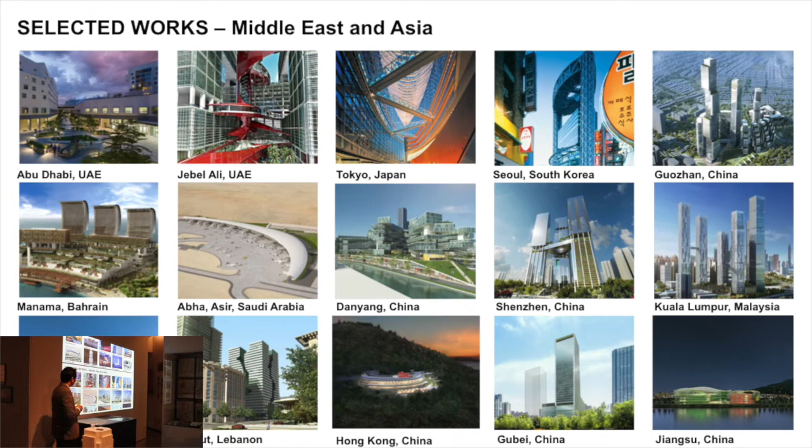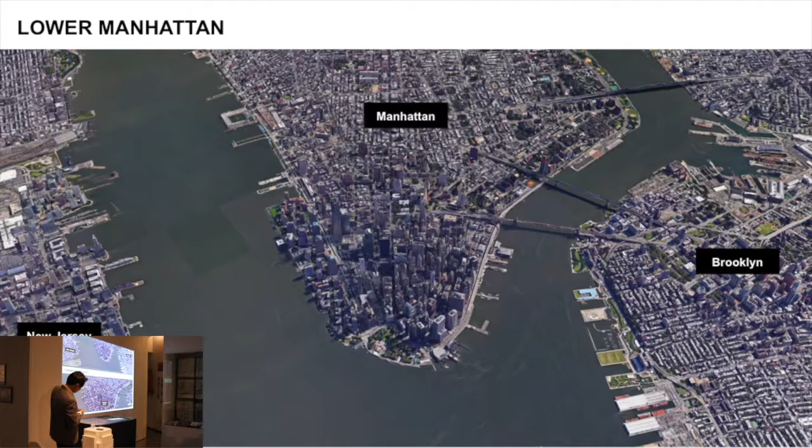So 125 Greenwich is actually very close to here. You can probably see the building going up as you go out after the presentation. It's in the downtown area. The screens are a little broken, but it's in the financial district, right south of the memorial, very close to the 9/11 site. And this was the existing building before we got on the project.

When we first got the project, the brief was to create a unique residential tower which meets the neighborhood, which is rising as a new residential neighborhood downtown. Because downtown in New York City, not that long ago, was not considered a really good residential area. But now it's becoming a really uprising residential market in Manhattan.

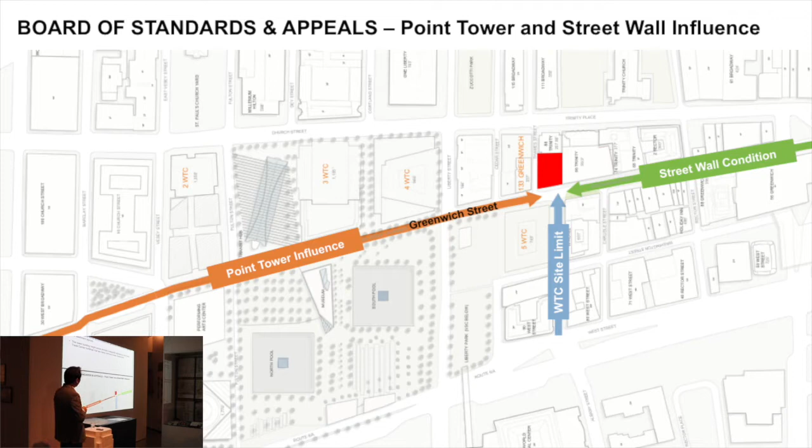There are many unique aspects about this building design, but tonight I'm going to focus on some of the zoning challenges we had, and the way we overcame that zoning challenge, which was the setback issues of this building.

The site was bound by the 9/11 World Trade Center Memorial Site, where you can see 4 World Trade Center right here. Now there's a Marriott Hotel right here, and we have a W Hotel to the south. To the south of this, we have the American Stock Exchange Building, which is a landmark building right next to our site. From there, most of the buildings are street wall type old pre-war buildings, and a lot of them are actually landmarks.

So hinging from our site, you have the brand new towers of 1 World Trade Center, 4 World Trade Center, and the Oculus. So all these new towers with the memorial to the north, and very traditional New York City downtown street wall architecture to the south.

We had air rights bought from the American Stock Exchange Building, which is a landmark, so they were not able to build any more height on their building. The owner bought the air rights of the building, so because of those air rights, we had a tremendous amount of square footage we could build onto this tiny little site, which is barely 80 feet wide and 100 feet long.

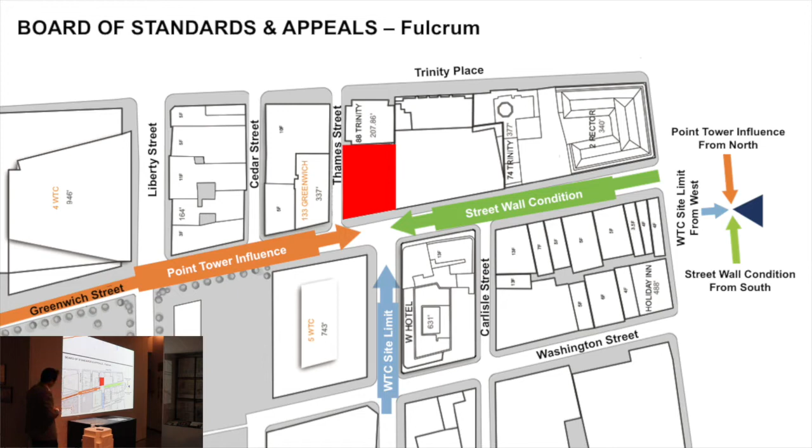So if you look at the slides, this was the 20-foot setback scheme we did. To study the scheme, we came up with the minimum dimension of the room sizes, the minimum width of the room, minimum depth of the room, and things like that. We found that to make the 20-foot setback work, we ended up having very inefficient spaces in the end, which makes the building very, very unfeasible. And then efficiency goes down.

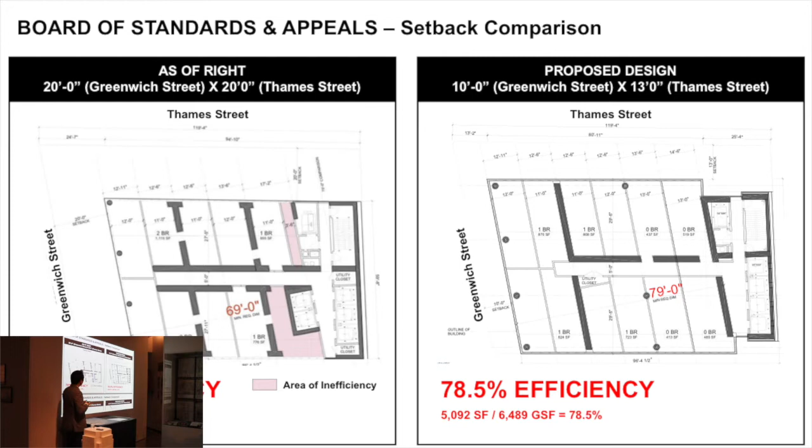Because if the building is smaller, it's going to be taller. So we need more elevators, which take up more space from the circulation point of view. So we had a very low efficiency with the 20-foot setback because of the height of the building. So what we proposed was that instead of 20-foot and 20-foot setback, we proposed smaller setbacks, so we can build a bigger plate, and then we can build a shorter tower.

So we proposed a 10-foot setback on the Greenwich Street side, and a 13-foot setback on the Thames Street side. We proposed a slightly bigger setback on the Thames Street side because, if you have a chance to walk Thames Street, it is a really, really narrow street, and we have a hotel which is already built and used right across the street. So our building is extremely close to that building, and we wanted a little bit more buffer on Thames Street.

And also the depth of the building: if it is too deep, the efficiency is not really working that well. So when we studied the optimal depth of the unit and the distance from the neighbors, we decided 13 is an optimum dimension for the setback on the north side.

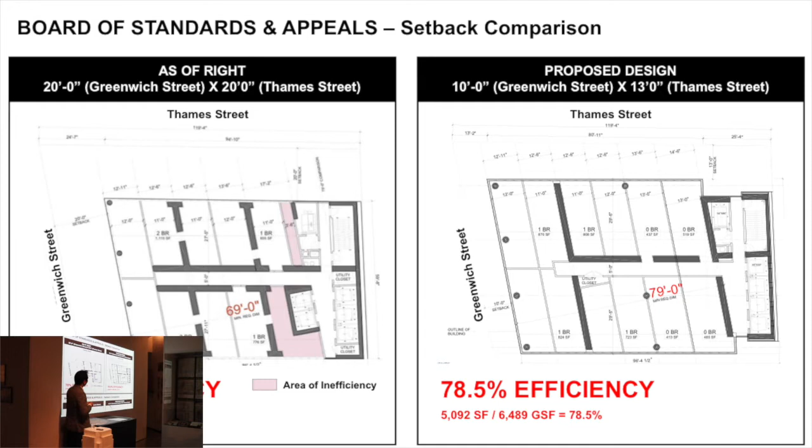So we created this little image to convince the BSA board and the committee board that we needed a variance of the setback dimension, saying that if we do an as-of-right building, which we can do, the building is going to be over 1,000 feet tall, very slim, very challenging, and also kind of out of context with other tall towers on the site. But if we do the smaller setback by variances, we can do a slightly shorter tower, much more efficient, and it's going to fit into the surrounding buildings.

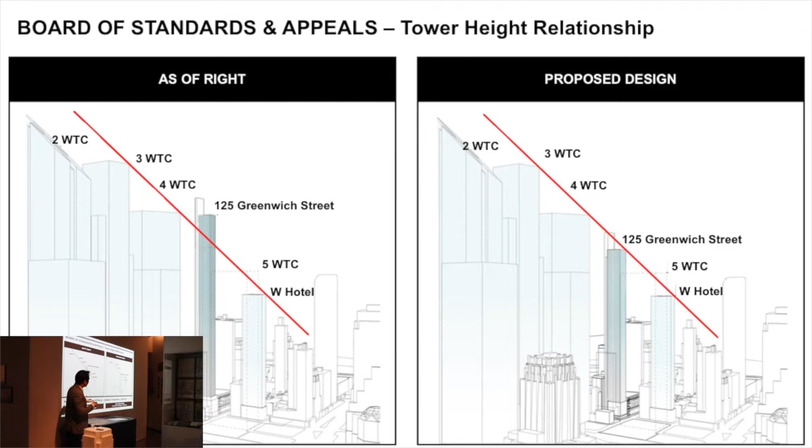It's kind of hard to see here, but the height around our project is fairly tall, and if we fit within the 900-foot realm, our building is going to look like the last piece of the World Trade Center site, because all these tall buildings, starting from the World Trade Center, are kind of coming down in terms of height. So instead of having a very tall building sticking out, we said if we can get the variances, we can do the tower within the height of the surrounding buildings, which fits better than the as-of-right. And also, Steve did some engineering comparison.

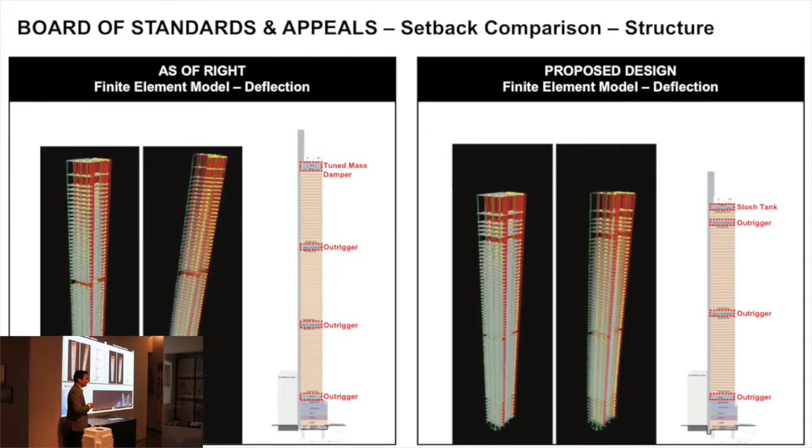Just so you know, in terms of ratio, the BSA scheme, which is the current scheme, had a slenderness ratio of about 1 to 14. If we go with the as-of-right, with the 20-foot setback, this could have been 1 to 20, even more. So there's no comparison in terms of engineering. It's kind of hard to see here, but this was the original scheme we proposed for the competition, and that was the BSA scheme when we went to the BSA board.

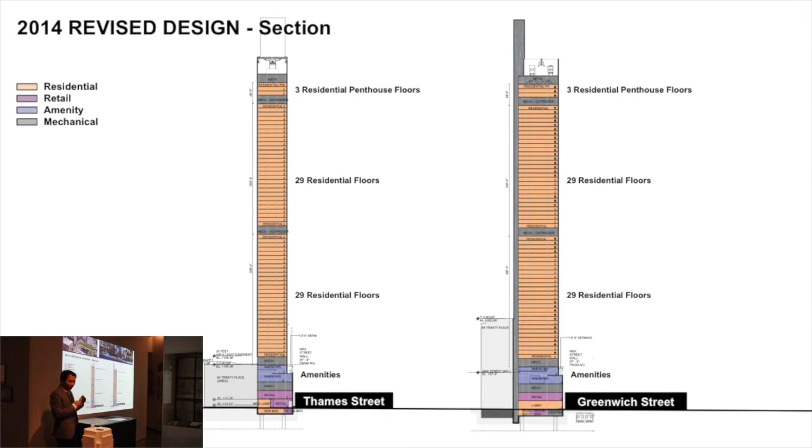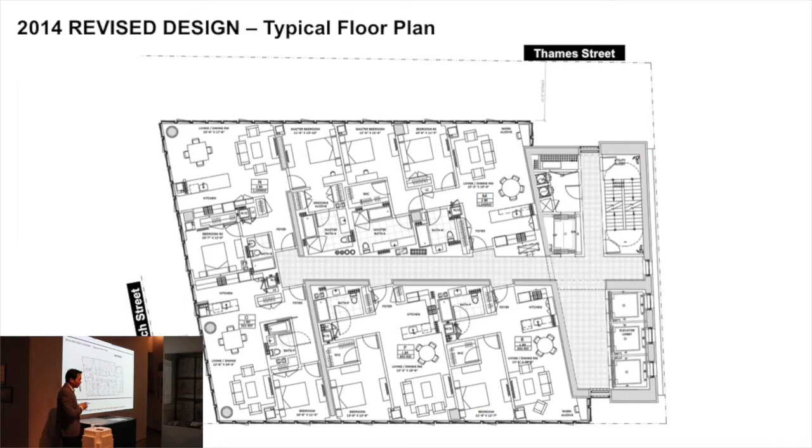So that was the major part of the design for the BSA, the setback variation to get to the height of the building as of now. And that was a typical plan at that time. At that time, the building was actually planned as a rental building. Then there was a market change in 2015, and the client wanted to change the project from rental to condo. When that happened, we looked at both options again.

For the super slender tall building, the client wanted to look at an option of actually doing the condo super slim, which is the as-of-right scheme. In the end, we convinced the owner that the BSA scheme is more efficient and more feasible, even for ultra luxury. One of the factors which made the decision possible was that the downtown market in this neighborhood is completely different from Midtown. If you think about 432 or the 57th Street projects, all the units are very large. 432 has a 1,300-square-foot one-bedroom apartment, which is very rare in New York City.

In this neighborhood, in downtown, basically we're saying no one's going to buy a 1,300 square foot one-bedroom unit. So this is more of the market for young professionals with probably one kid or no kids, starting a career, working in the financial district, and so the units are going to be much smaller sizes, more towards the one-bedroom, studio and two-bedroom units, and a very small number of three-bedroom units. But it's going to be very luxury too, because of the height and because of the neighborhood also.

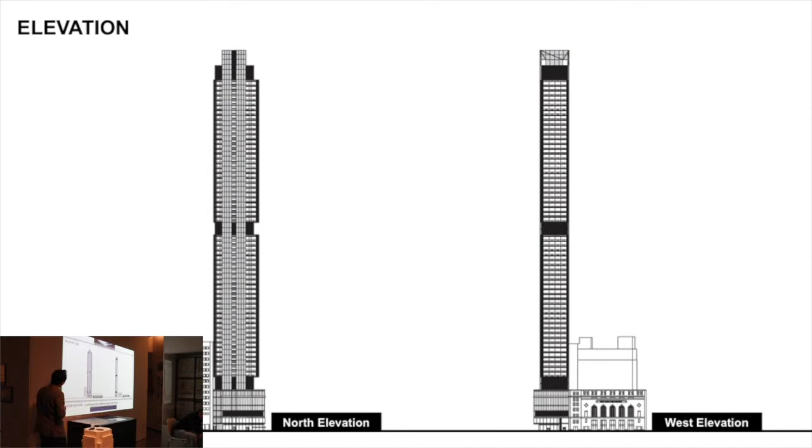And then the other thing about the final design of the new tower was that when we decided to go with the condo, one of the moves the owner made was putting the amenities for the tower at the top of the building. So you can slightly see the top floor over there is a double height. That is actually a pool for the building.

So Rafael actually made this argument that if you are selling these apartments to young people who basically spend their nights in a 400 square foot studio, not everybody in the building is going to have a great view. So one way of appealing to the market is that you can have the view whether you're living on the 3rd floor or the 50th floor: you can go up to the top of the building for your lounge, for workout, for swimming, and enjoy the view. Everybody in the building can go up to the top and enjoy the view.

But it's not easy, because naturally you want to put the most expensive apartments at the top of the building, but having the amenity on top has a very unique aspect, which is very, very appealing to the market. In the next slide.

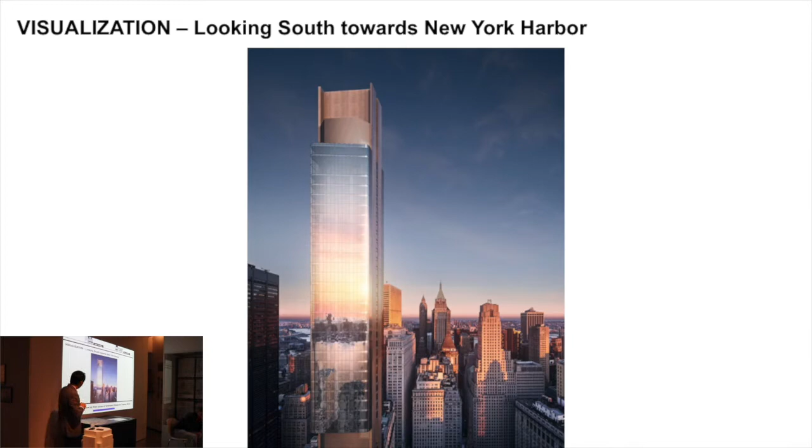And also Steve's going to talk a lot about the structure of the building, and we also have a very strong structure, which is holding the building but also works with the layout of the building. So we use the structure, which is big shear walls running north and south and across the building, to basically compartmentalize the plan. So we can use that for demising between the units and combining units and things like that. We can see that in the plan.

And then we also created a very unique podium in the tower. Since we moved all the amenities, which are normally in the podium, to the top of the building, we have a podium which is residential units. We don't have the plan for the presentation tonight, but we also have loft units here, which kind of follow the American Stock Exchange building's design language. We have very tall windows, and within that window we have loft units looking down at the memorial.

So this is looking south. So we have the World Trade Center right north of us. So the north view is kind of limited if you're dead on to the north, but we are very open to the west and the east. Next slide. And then the west view is just amazing.

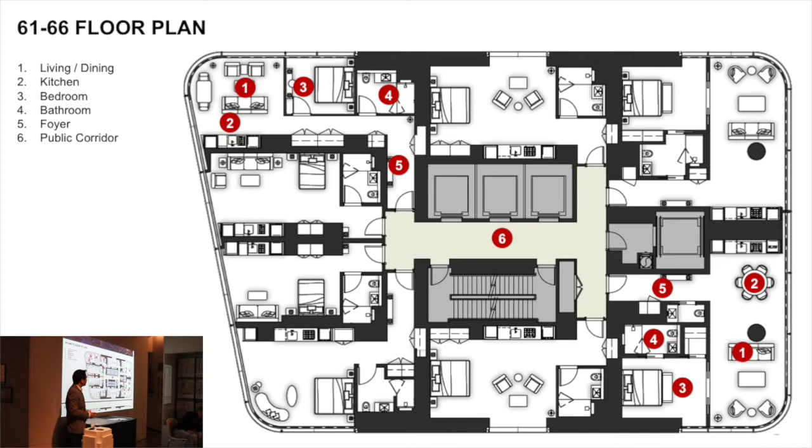So next slide. You can see that this now becomes 2 units. Before it was 4 units. In the next slide, this unit is combined with the unit in the middle and becomes a 3-bedroom unit, and the one in the middle becomes a master bedroom. So we basically create a series of compartments from the structure and use that as the layout. Next slide. And then that was a penthouse.

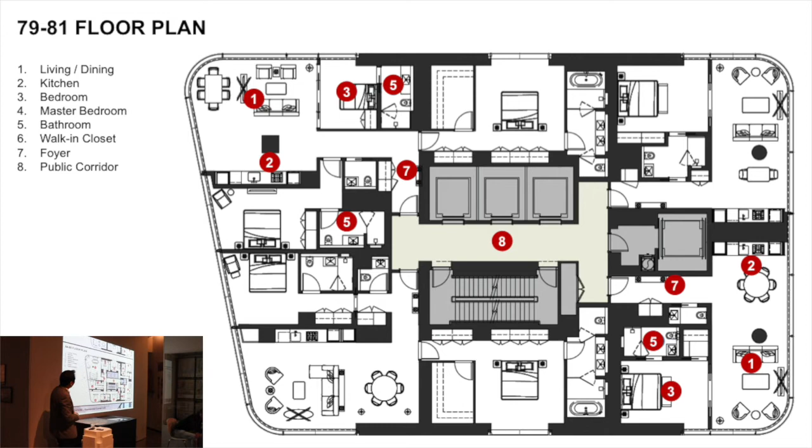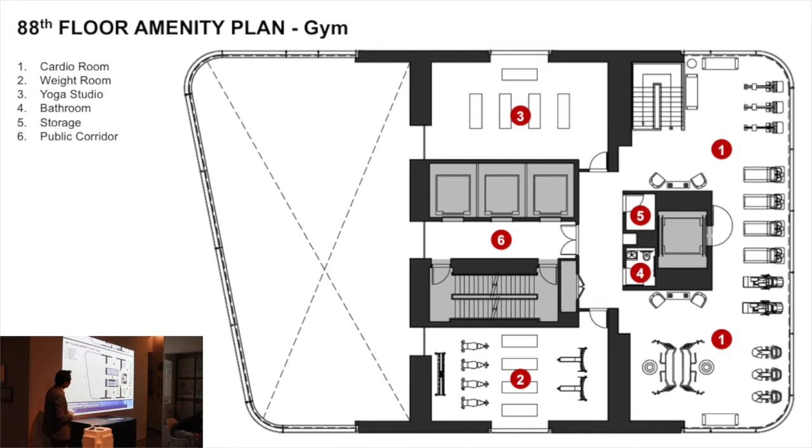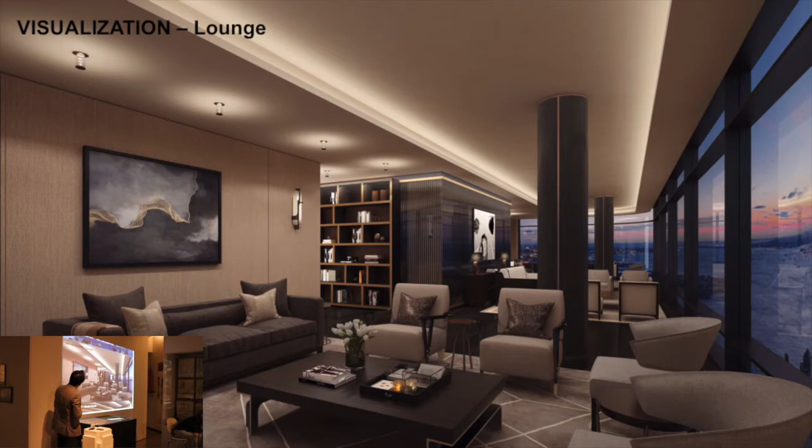So if you look at the rendering, next slide, basically the top of the building is the club. I think they call it Club 88 because the top floor is the 88th floor, and that's the view of the lounge. That's the screening room. And then that's the pool.

And then on the ground floor, by the zoning, we provided the covered arcade on the Thames Street side. So we basically widened the Thames Street side. It's more walkable now with the project itself. When the project is done, it's going to be more walkable. Right now Thames Street is not even 3 feet actually. Hopefully it'll get better with our project. And then this is a view of the lobby.

And then that was the beginning of the project when the existing building was there in 2013. And then in August, we demolished the building. Next slide. And in 2014, construction started. All right, next slide. And then when the market changed, when we were changing from rental to condo, there was a little bit of a hold up. But construction started back in 2016.

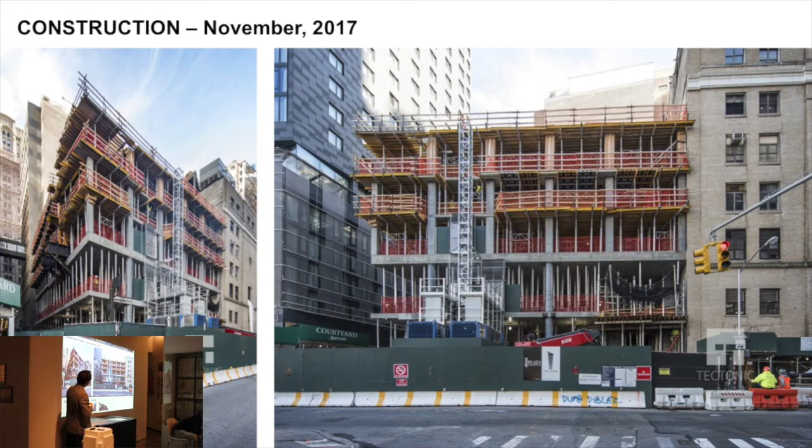And next slide, 2017. Now you're seeing the podium where we have loft units. And the next slide. The last one is a photo I took a few weeks ago, which is pretty much right now. And that's it for the presentation.

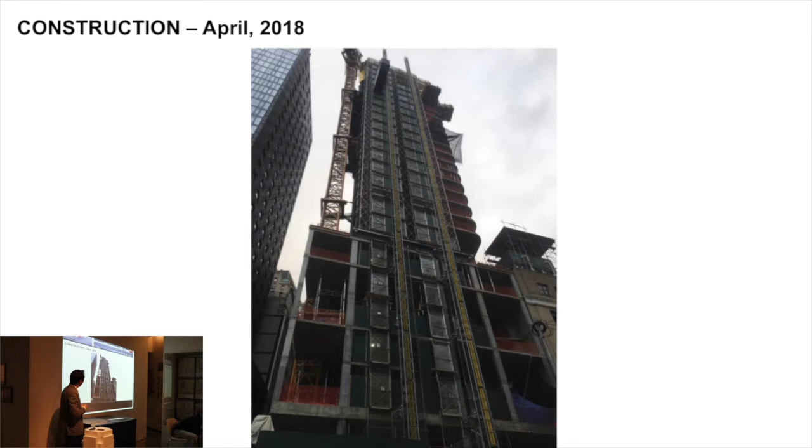Fingers crossed. I've got my timers. Most of my crew's here, so if I've got a problem, I'm assuming one of you guys in the front row is going to jump up and help.

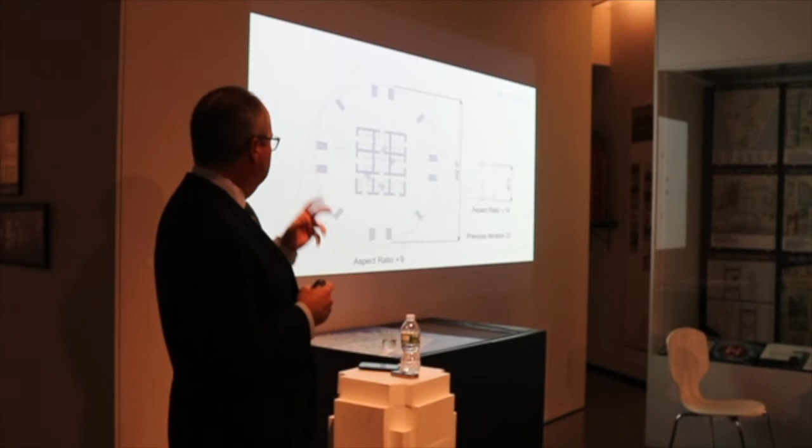But again, what does height really mean? And when we talk about height and the challenges of building tall, I like to think of it more in terms of slenderness, okay? The building to the left is the Shanghai Tower. That is a mega tall building. But when you look at the footprint, it's 242 feet at its widest portion, which gives it an aspect ratio of about 9:1. And again, Jin mentioned that our building, while it's 913 feet, it's 65 feet, maybe even less, puts the aspect ratio at about 14.

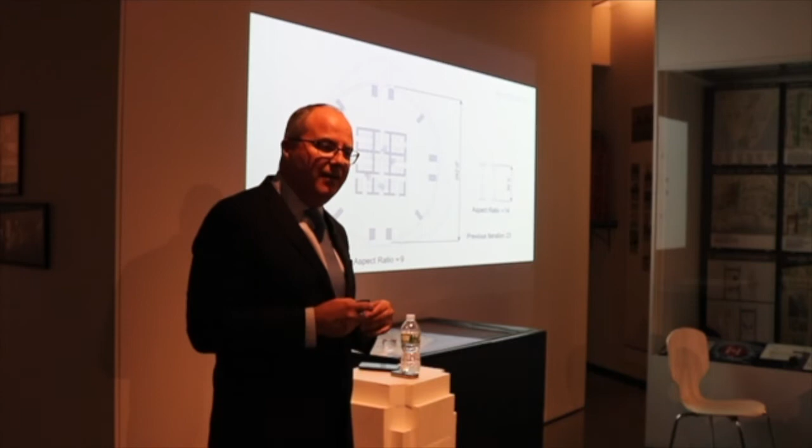So from a challenge standpoint, not to take anything away from the Shanghai Tower, but the challenge, at least as we find it, is not so much in the height, or the absolute height, but it's more in the dimensions of the building, particularly the aspect ratio.

I always start all my presentations, particularly when I'm speaking to students, and you all are students of high-rise: buildings are just beams, and whether they're wide flanges or tubes, they're really actually simpler the taller and taller we go. And I say that facetiously. They're simpler in that we have fewer and fewer parts and pieces to rely on.

Again, and this goes to sort of the theory, right? In our office, relatively quickly, when you look at a high-rise building as a cantilever beam, if you will, you can really draw a circle around the ultimate solution using hand methods, right? Opening up a steel manual or a design manual, looking at the equations for calculating displacement and moment in a cantilever beam. You calculate your wind loads using the code, and you can really determine relatively quickly at least a ballpark of what the solutions should be. Okay? And that's an approach that we always take.

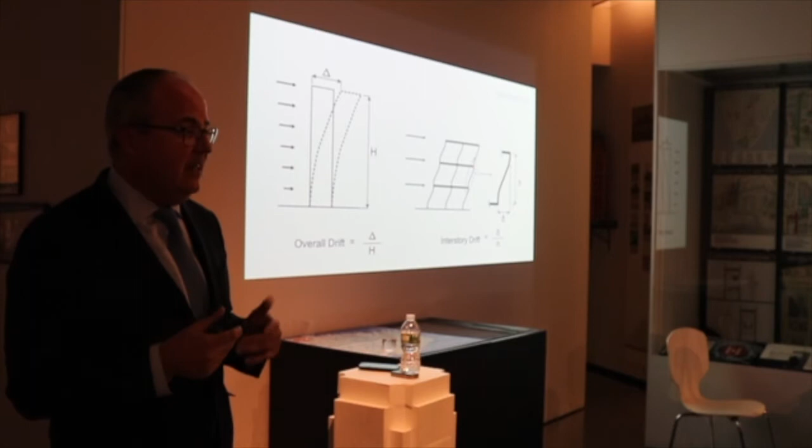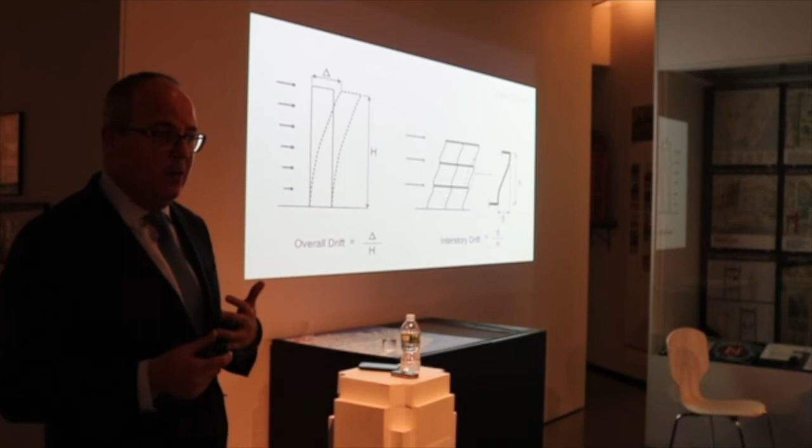They weren't curtain walls. So limiting the amount of motion or movement, if you will, that the building experienced made some sense. It also made some sense from the standpoint that our analysis ability back then wasn't that great. So when you limit the overall displacement of a building, you also limit the amount of secondary effects that occur because of a lot of displacement. So recently we've sort of thrown all of this thinking out the window.

Again, I don't really care how much a building moves. What I do care about is how the building moves. And one of the performance targets that we use is accelerations. Quickly, think of driving in a car, windows closed, music on, 60 miles an hour, you don't feel the speed. If you put your foot on the brake, you feel that deceleration. If you put your foot on the gas, you feel the acceleration.

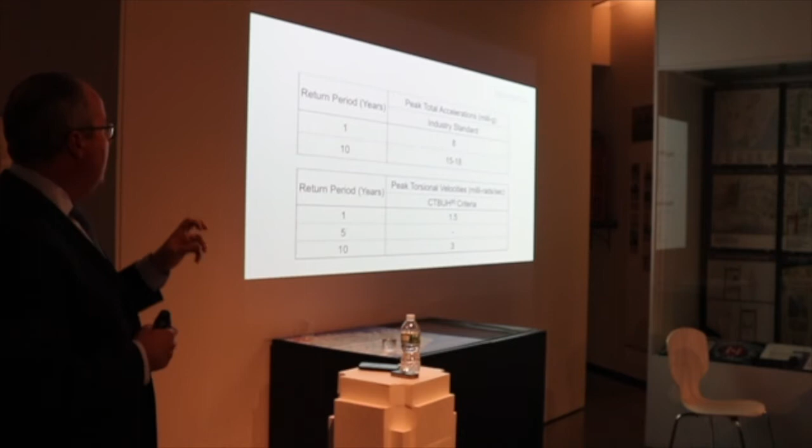So if you think of a building moving in space like an inverted pendulum, it picks up speed, it decelerates, stops, and then starts all over again. Those are the things that occupants feel. They feel and perceive that acceleration and deceleration. So typically we like to limit that. We use return intervals, particularly a 1-year wind and a 10-year wind, and we limit that performance or that response to accelerations measured in milli-g's. That's 1,000th of the force of gravity.

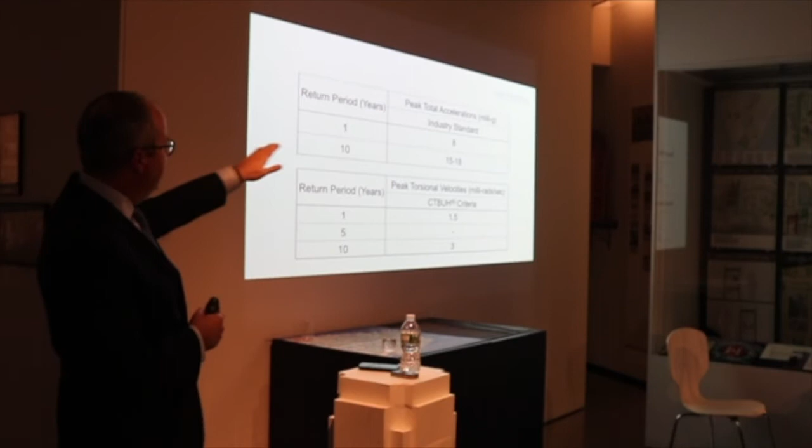A lot of times we're always arguing, and you see 1 year is 8, 10 years 15 to 18. To me, when you're dealing in thousandths of anything, the difference between 15 and 18 is round-off. But I'll get a little into that. So again, these are the performance standards that we set for these high-rise buildings, forsaking really all of the other things that we used to use.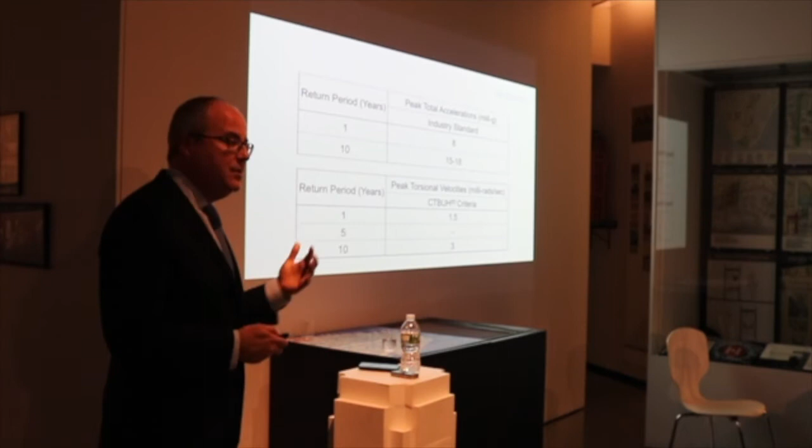This is another interesting study that has come out of a lot of the evaluations that we've done: long period buildings tend to respond differently than short period buildings. Short period buildings are squatter. The longer period buildings tend to be the high-rise buildings.

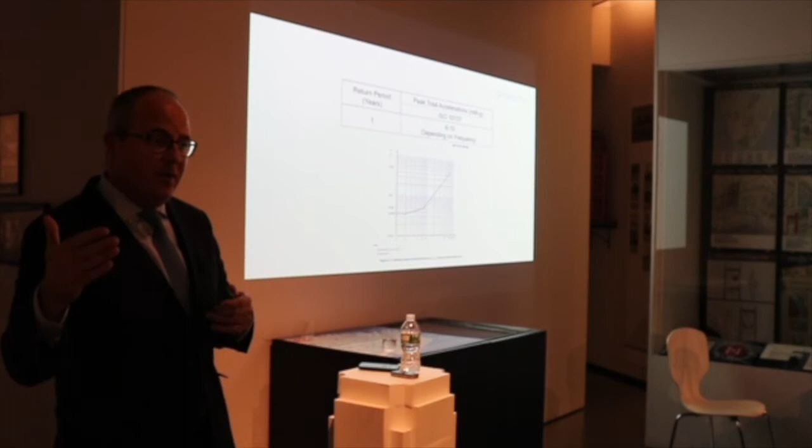I'm going to show you this little video, and you'll see, if anybody knows, that's Melissa Burton. She was actually a student when these were made. She used to run BMT, I don't know where she is now.

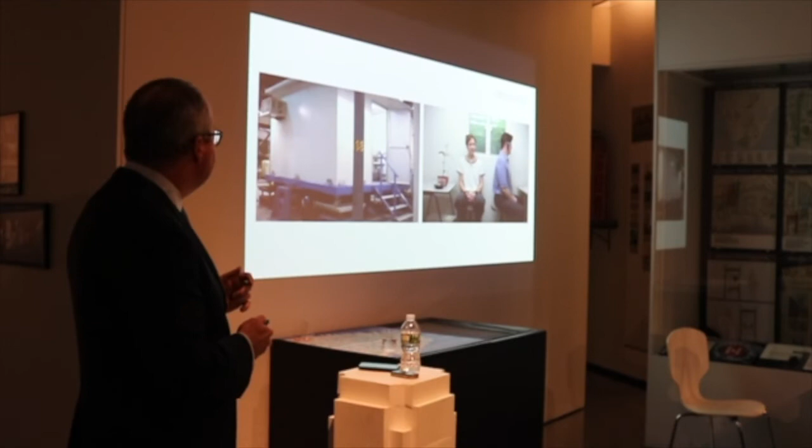So what are the factors that affect building response? Shape. Buildings do not want to be aerodynamic. It sounds counterintuitive. You don't want your building shaped like an airplane wing, because if it's shaped like an airplane wing, it's going to generate horizontal lift or force that would rattle the building. Damping, and I'll get into what damping is. Damping is a way in which we flatten peak responses, similar to the action of a shock absorber in a car suspension system.

Height, again, we're talking about that. Slenderness and weight. The weight of the building is important. Simply think of Newton's law, force equals mass times acceleration. Solve for acceleration, which is the criteria we're interested in. And the heavier the building, the lower the equivalent acceleration. Which is why most of the high-rise, the tall, super tall, mega tall buildings are made of concrete and not steel.

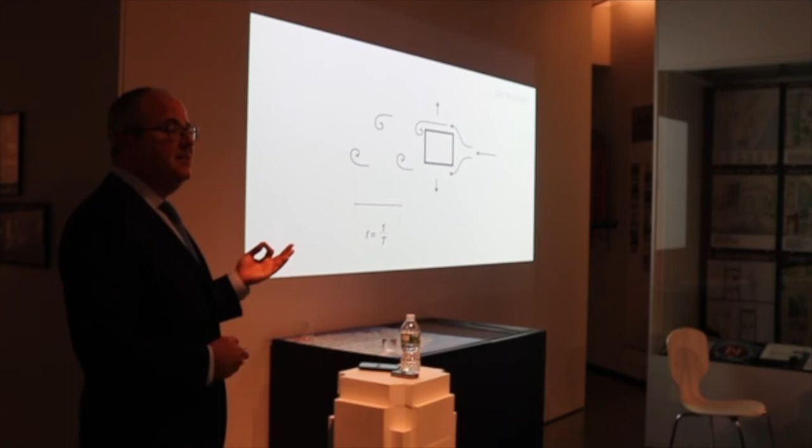So, when I look at shape, square buildings, I've got a video here. What we're concerned about is this phenomenon known as vortex shedding. When the vortices that organize on the corner separate at a period equal to the building's, we wind up with a resonant condition which super excites the building. This is a video of what that is.

Thank God, where are you, Josh? Thank God these videos are working. I appreciate that. Many of the presentations they don't.

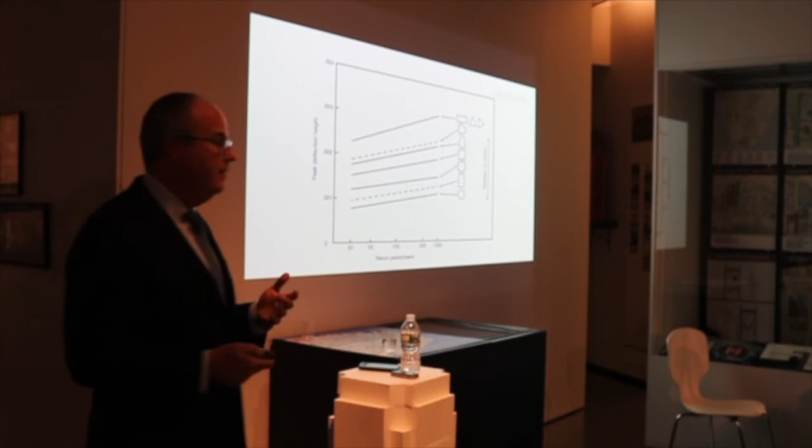For us as engineers, looking at that round shape and taking it a step further, this would really be the ideal building for us. But that's why engineers are engineers and we're not architects.

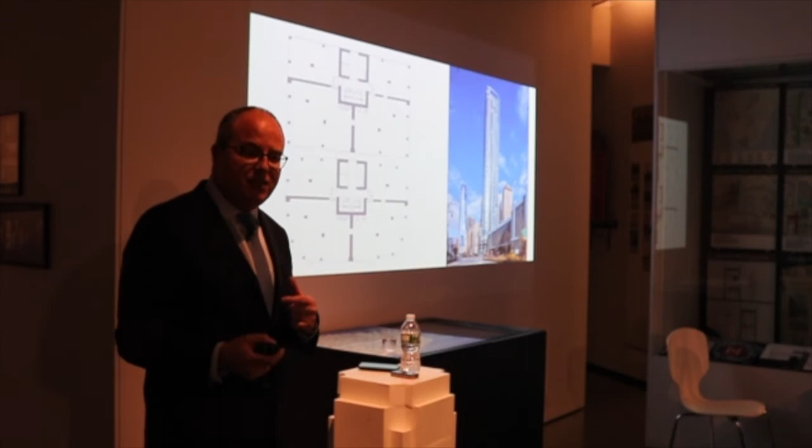So these are some buildings that we've done, and Carol mentioned them, tall, super tall, call them what you will, but where we've integrated what we'll call shaping studies, right? We look at how we can make and modify the shape of the building to improve its performance, okay?

So this is 50 West Street, and we had two moves here. We put a hole in the top, which you can see there, and then we simply rounded the corners, and this is what the building looked like originally. This is ultimately what it looked like in the built case, okay?

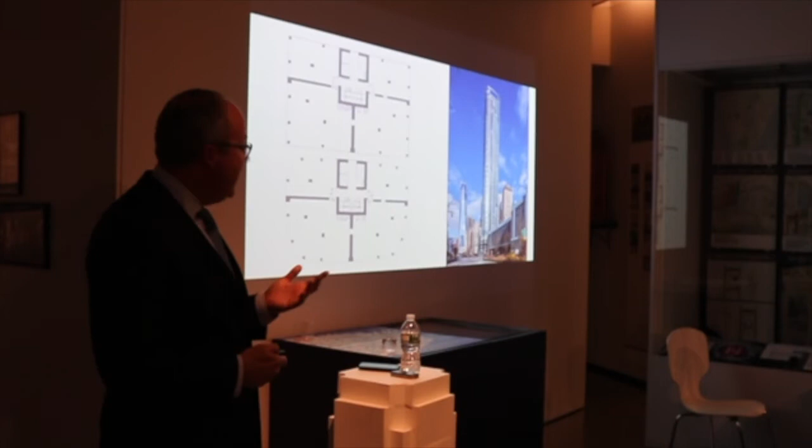This is a building that we did on 22nd Street with KPF. It was a shard-shaped building originally, and ultimately what we came up with through a shaping study is a building with chamfered corners, okay, and that's the finished product. And you can see the chamfer actually changes with height.

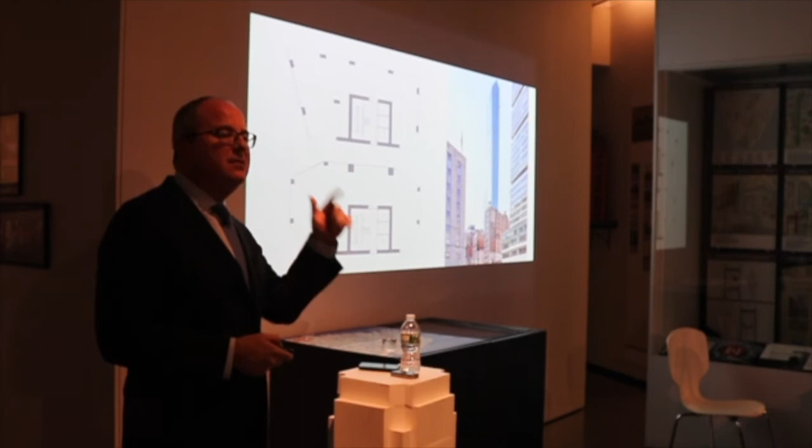So what we're doing there, with the vortices on the previous slide that I showed you, is we're confusing those vortices. We're preventing them from organizing on the corners of the buildings by constantly changing the shape of the building, okay? Now, what does that really mean, okay?

This was the study that we did on 22nd Street. We looked at 19 different variations of building shape, okay? And originally when we went into the wind tunnel, we realized that we couldn't throw enough mass, enough stiffness, nor enough damping at that building to meet the performance criteria that we set out at the beginning of the project.

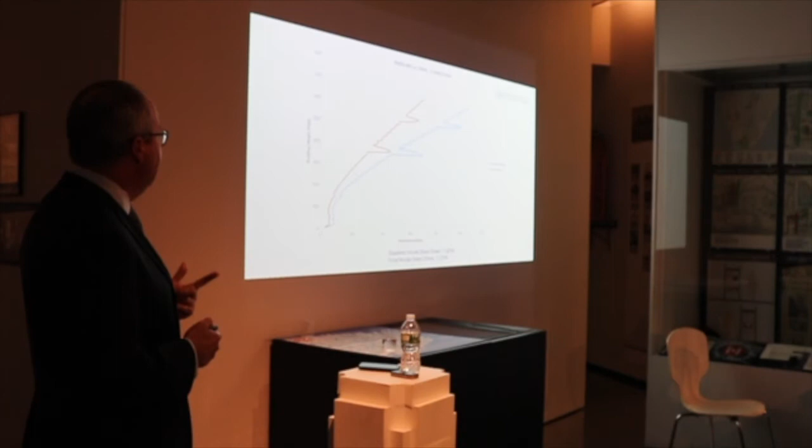So you can't change the wind environment, you can't move the building from its site, so what we wound up doing is undertaking the shaping exercise. And ultimately what that did for us is it reduced the net effective force on the building significantly.

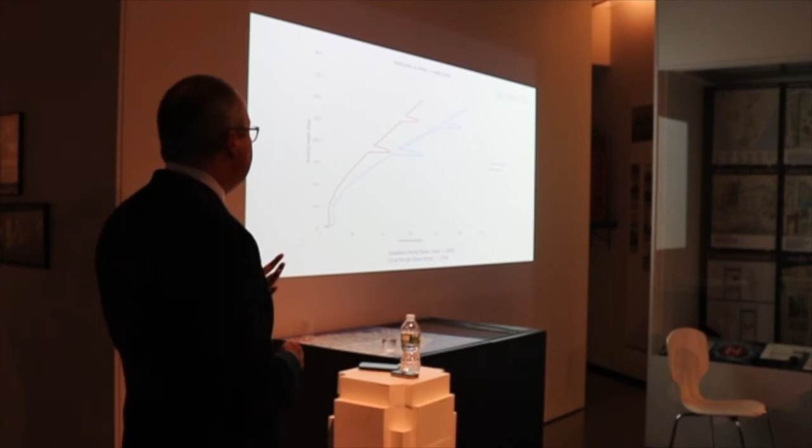So if we look at the bottom, the baseline model, which was sort of that extruded shard, had 1,900 kips of wind force at the base. Okay? By merely shaping it, we reduced that number down to 1,200. So a 30% reduction in effective wind force merely by changing the shape of the building. Okay? So those are the types of things that we've been doing on these high-rise buildings.

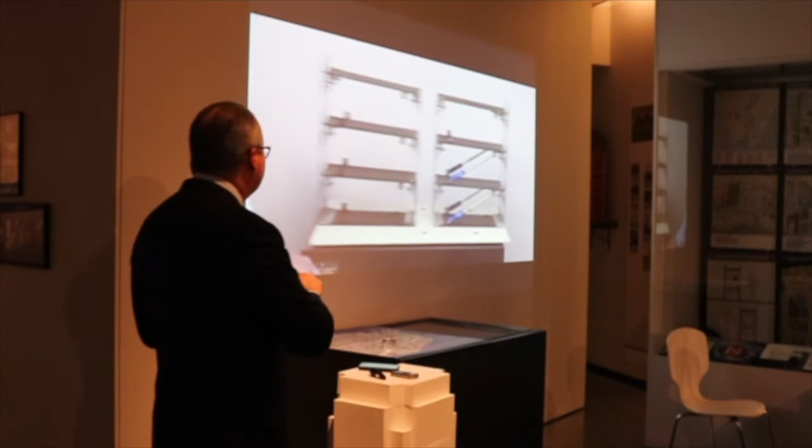So let's talk about damping. Okay, what is damping? This is probably just the best way to show what it is. So I'll be quiet. The left one's undamped. Enough of that.

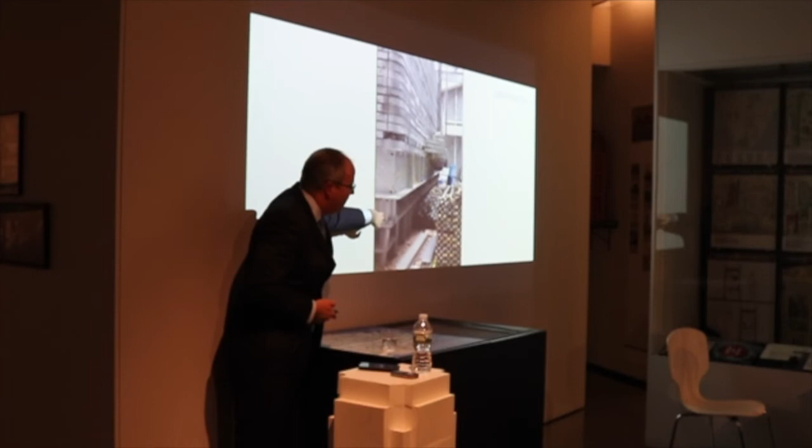So this is actually a damper that we've got on one of our buildings. It's not a great video, but I'm going to play it anyway. Okay. And you can see the damper's hung from a pendulum. There's viscous material on the underside of the mass. And you can see how it...

So Newton's other law says things in motion tend to stay in motion, things at rest tend to stay at rest. So essentially what happens is the mass of the damper wants to stay at rest, and the building wants to move underneath it. Okay? What floor is that on? That's at the roof, so it's probably about 800 feet in the air. Okay. Done with an iPhone, it's not like this.

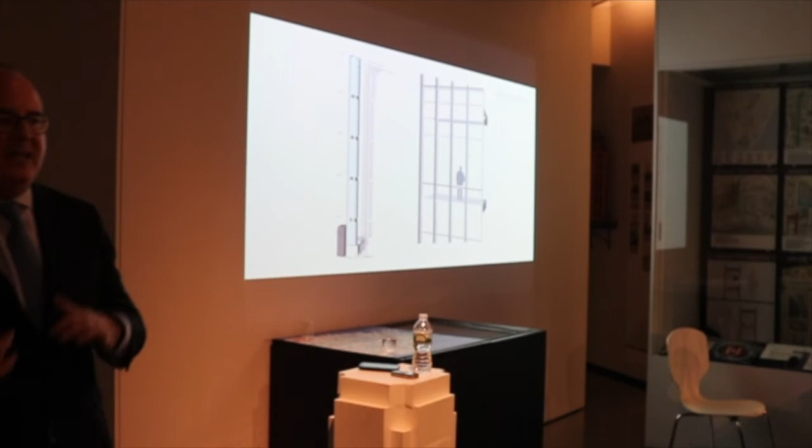So, when we originally conceived this building, and Jaina talked about the difference between the BSA scheme and the as of right, the building was north of 1,300 feet tall. Okay? So what we had done in the past is we try our best, we go to the wind tunnel, we get the results, we hope and pray that we don't need a damper, because dampers run anywhere from $2 to $4 million, and then we react.

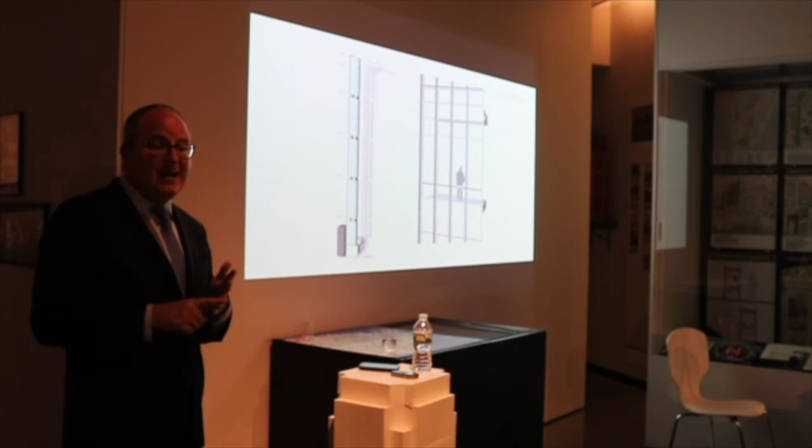So at this height, we knew that we were going to need a damper, and we knew that we were going to have to shape the building. Okay, that was the only way that we were going to reach the performance targets that we had established and try to get it on the first try. So what we wound up doing, let me just go through this.

So when we look at damping again, we assume 2% inherent damping in all our concrete buildings. Okay. What we found is that through artificial damping, we can add an additional 4%. And building response, this is where I'm getting into the engineering part, is inversely proportional to the square root of the damping.

Right? So when you double the damping, you don't reduce the response in half. But when you go from 2% to 6%, you essentially can count on almost a 40% reduction in building response. So you get a lot of bang for your buck there.

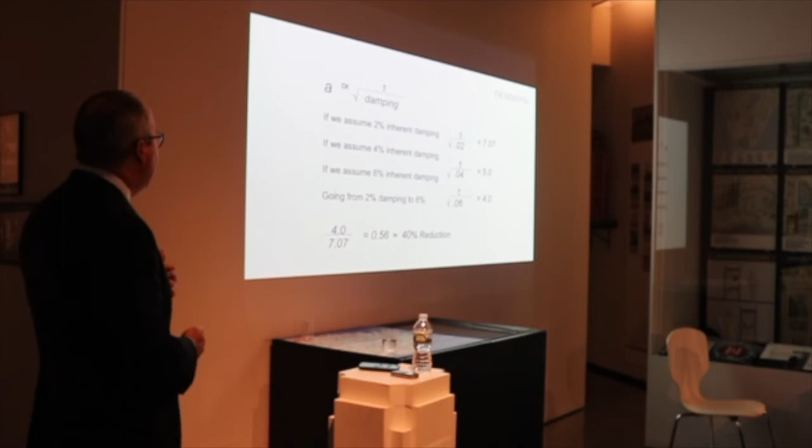So what we typically do is, again, we almost work backwards. We reverse engineer it. We say, all right, we know that we can get 6% damping. We know that our target response is 18 milli-g's. What does the building need to do? How does it need to respond undamped? We do the math backwards and we say, hey, listen, if we can get to 32 milli-g's undamped, we know that we're in striking distance.

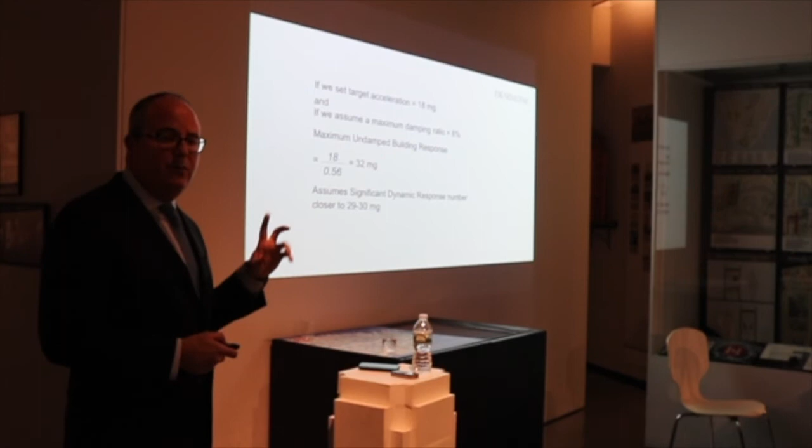So again, what we do is we build a 1 in 400 model. We build 400 yards around the building, a lot easier now that we have Google Earth. And then the model itself is actually on a turntable. So we turn the building through the wind in 10-degree increments. It's on a little pivot at the base, and it moves in the wind. We do an eigenvalue calculation. We calculate all the responses. Again, all the stuff engineers like to talk about.

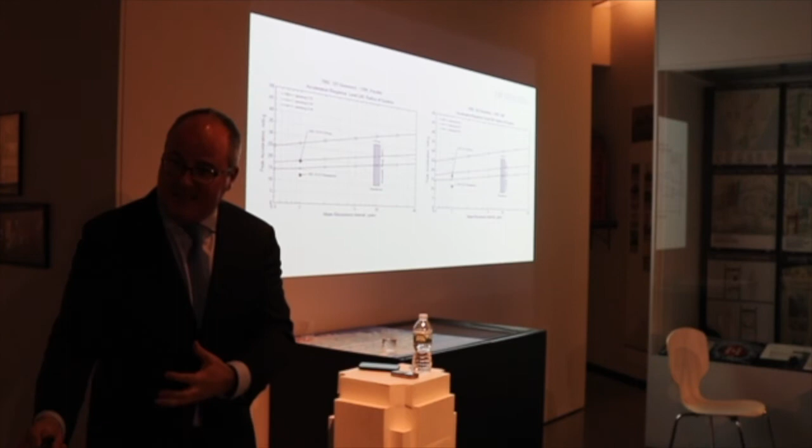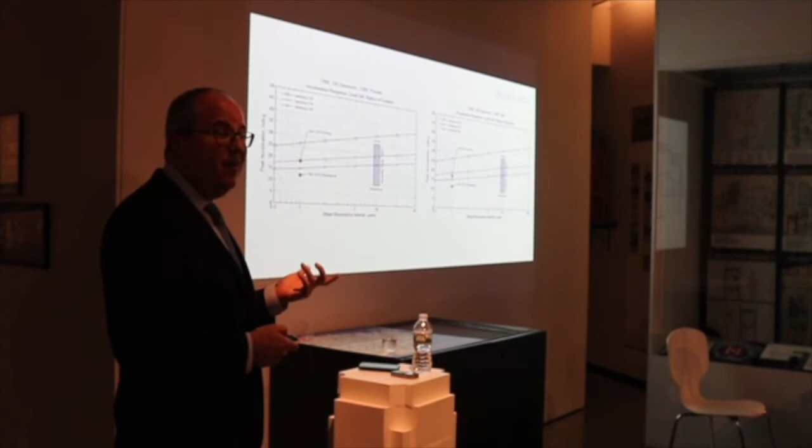What we found out really quickly is we wound up on the first shot getting the building to meet the performance criteria utilizing all these shaping techniques, which for a building of this height is really unheard of. So we took some of the precedent that you guys had at 432 Park, some of the precedent from other projects we had worked on. We incorporated that into the shape and we got it on the first go. And you can see, we're at 19 milli-g's at 1,400 feet of height, which is pretty good.

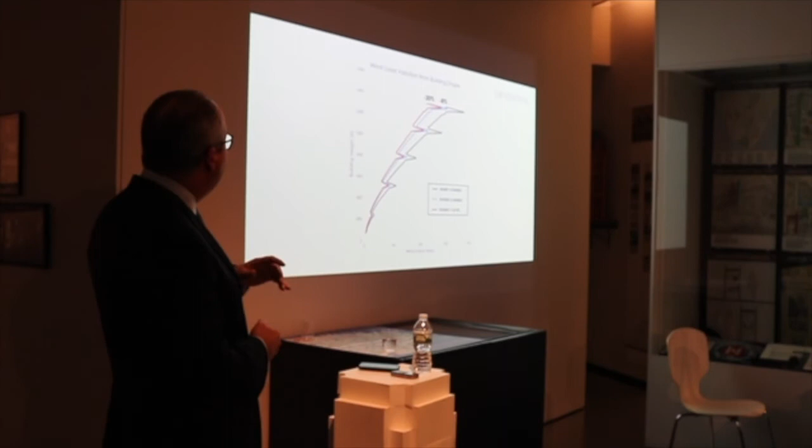And again, what did those different moves do for us? So I told you we had sharp corners. That was our baseline in black. Rounded corners, we got about an 8% reduction in wind force. When we combined the rounded corners with the blow-through floors, we got up to a 20% reduction in effective wind force on the building.

So these moves really matter. I think they make the building look cool, but we're doing it for a reason. So the next time you look at a building and you see round corners, you see a pop through the top, you see these blow-through floors, it's less about architectural expression and more about aerodynamics.

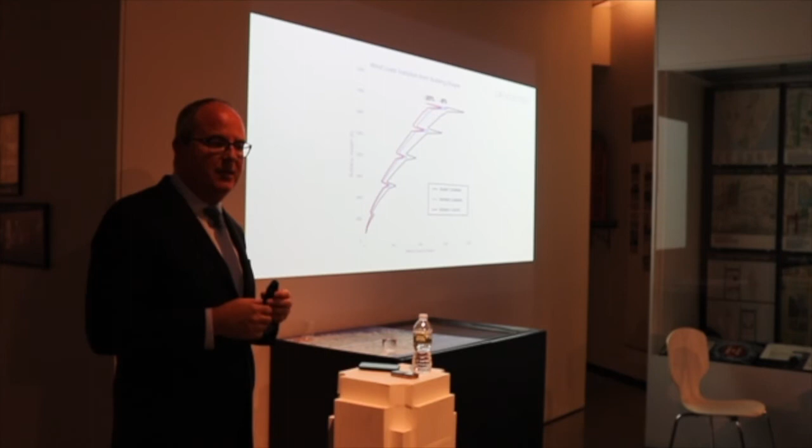And again, back to that slide where I say buildings are wide flanges or boxes. This building is all about a wide flange. And Raphael had very, very strong opinions about what the structure of this building would be, which is actually a good thing. Because when we're collaborating with architects and owners who know about what we do and understand the challenges we're confronted with, it makes for a better solution, and a faster convergence to the solution as well.

So this is where I tell you these buildings are relatively simple, because it's 2 wide flanges. But the fact that they're only 2 wide flanges means we really, really have to get it right. And the wind tunnel testing is a part of that, okay?

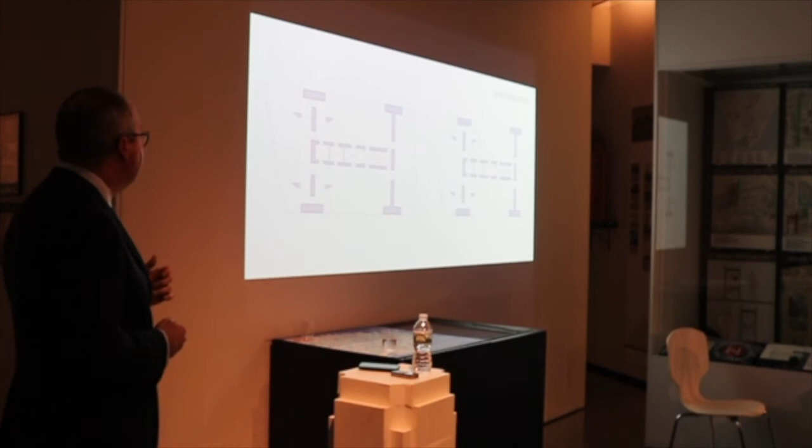So, unfortunately, we didn't get to build the 1,399 footer, the true super tall. So we wound up, I don't know ultimately where we're at, 912, 940, and there's rumor that we don't really know where we're going to be at the end of the day, but that's a different story.

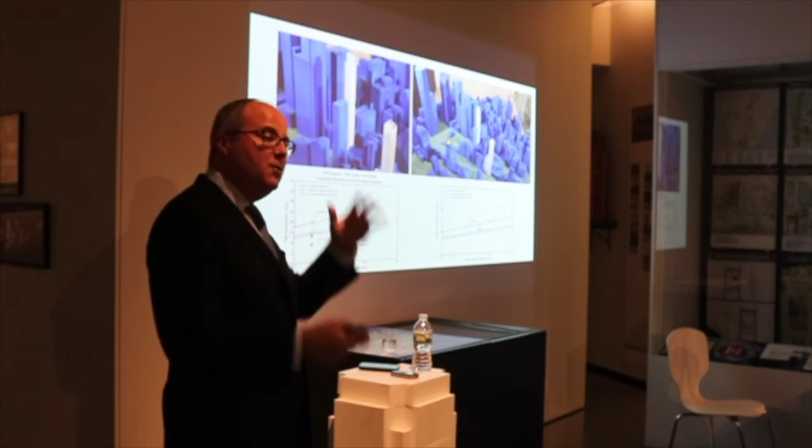So what was interesting is we understood the value of those moves. We understand the value of the shaping, the rounding the corners, the blow-through floors, right? And they became integral not only to our solution, but to the architecture as well. So when we shrank the building, we knew we were still going to get that value, and it was still going to provide us with benefit.

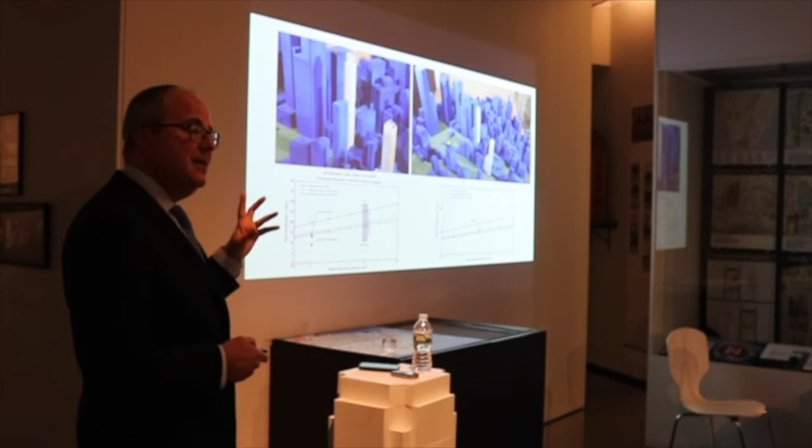We did need, ultimately, to still include a damper, but instead of the big $4 million pendulum damper, we're using a unidirectional slide friction damper. This is actually the one we have in 50 West Street, but this is a $600,000 damper as opposed to a $4 million damper. So again, we knew we needed to have damping to reach those performance targets, but because we integrated all of those beneficial moves from the higher building into the shorter building, we needed a lot less damping.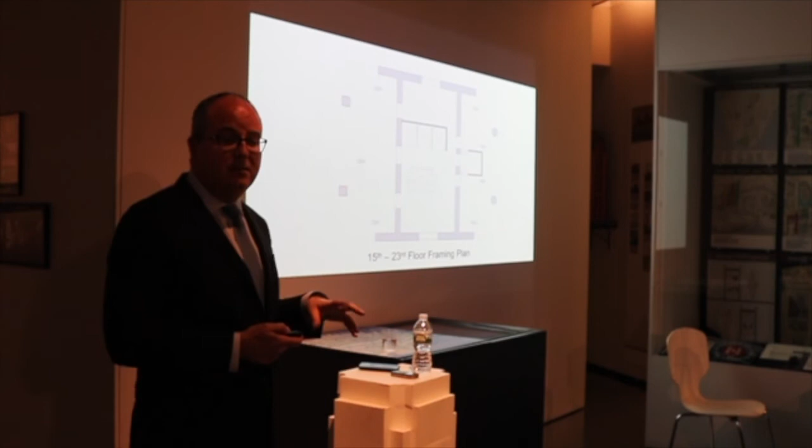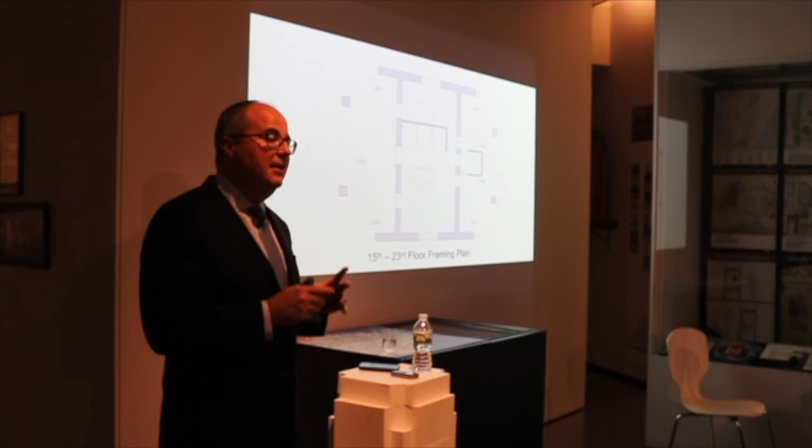And again, pretty clean. Ultimately, for us, when we think about the design and we roll over into constructing these buildings, we're 88 typical floors, right? So you make a mistake on one floor, you repeat it 88 times. But in terms of making these buildings cost effective, it's about simplicity. How do we get from the 2nd floor to the 88th floor as fast as possible? New York is a high labor market, relative to material. We could spend a little more on material to save on labor. So hence the reason why this is relatively simple plate, simple structure.

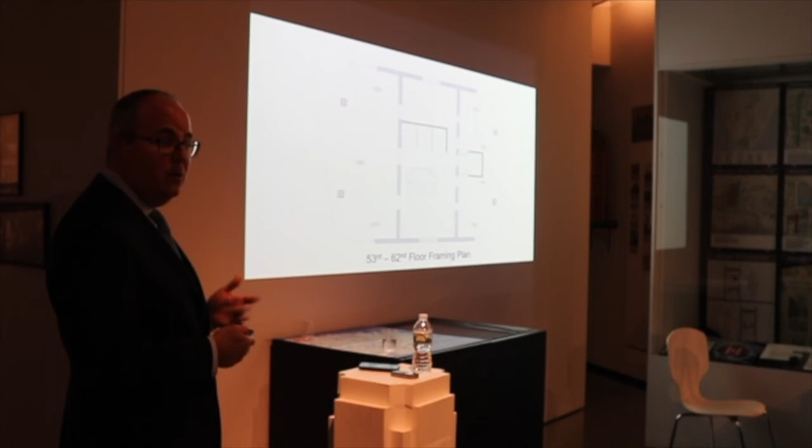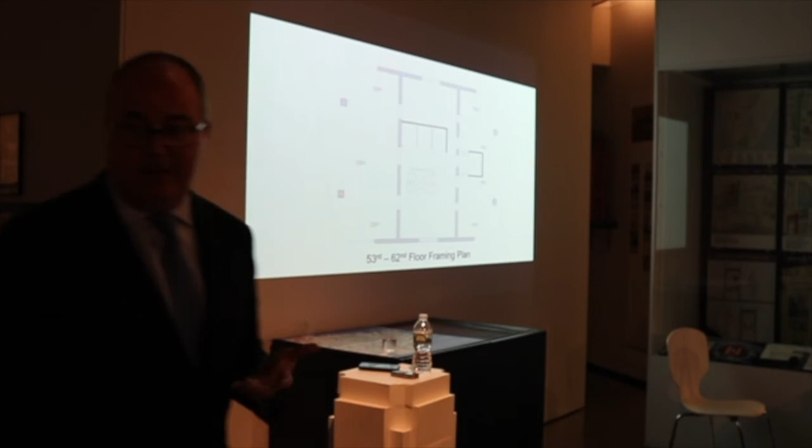This is what it looks like as we go up. Things get smaller, apartments get bigger, so it makes sense. You've seen these images. Let me just jump back quickly. The walls that make up the flanges of the wide flange, the architect didn't talk about this. It's actually architecturally exposed concrete, which posed some really unique challenges for us. You can see the full-scale mock-ups that we had built.

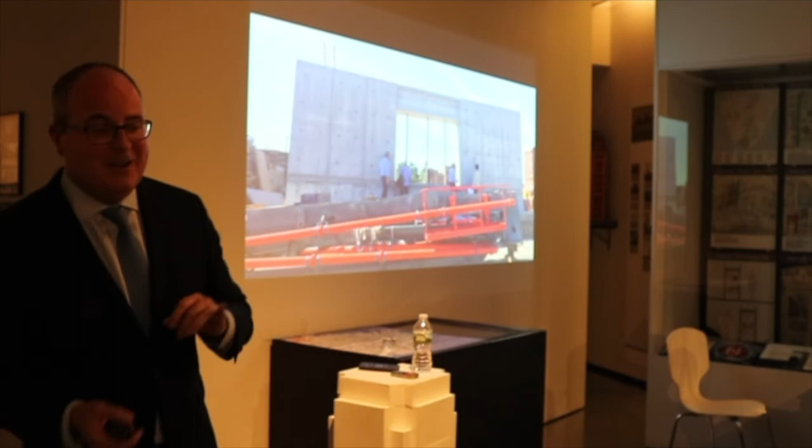What was interesting for us is we're trying to not only assure that we're getting a particular concrete strength, we're also looking for concrete modulus, which is the stiffness of the concrete, and we're trying to match a color and the finish. Color, finish, strength, modulus. We actually only got 3 of the 4. We got the color, we got the strength, we're battling the modulus, but we've got some safety in our pockets. These are the challenges when we go from pencil to paper to the field.

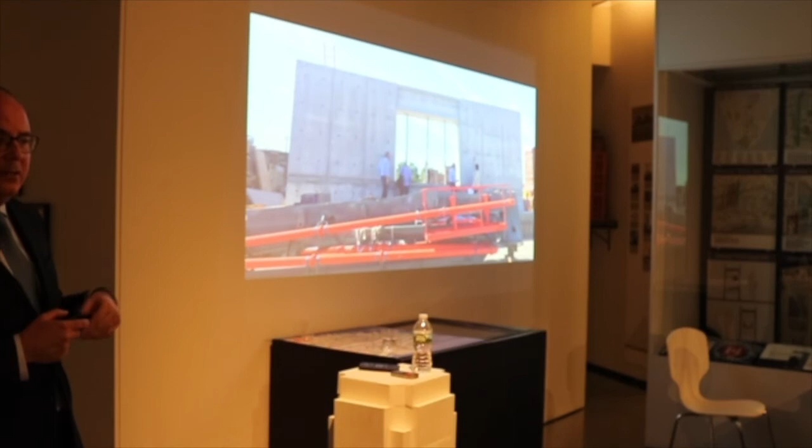Normally on these high-rise buildings, we're focused on strength, we're focused on concrete stiffness or modulus. We're not concerned about what the concrete looks like. So adding this extra bit of complication was a real challenge from a concrete supply standpoint. This is the hole. Again, super tight site. These were the shear walls up against the American Stock Exchange. Millions and millions of dollars just to hold the hole open, keep the streets alive. All that steel unfortunately just gets thrown out.

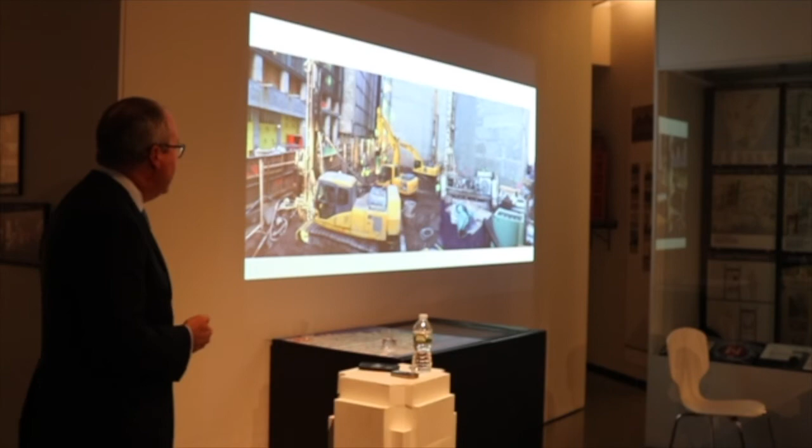Here they are. Look at the equipment: 3 pieces of equipment on a super tight site, which was a real challenge. These are the caissons that went to rock, 36-inch. How far down? 60 feet down to rock, with a 40-foot socket. So you take 88 levels of concrete, and you're concentrating on a tiny little footprint. The stress per unit area is really high. You can see here we're using prefabricated high-strength reinforcing cages.

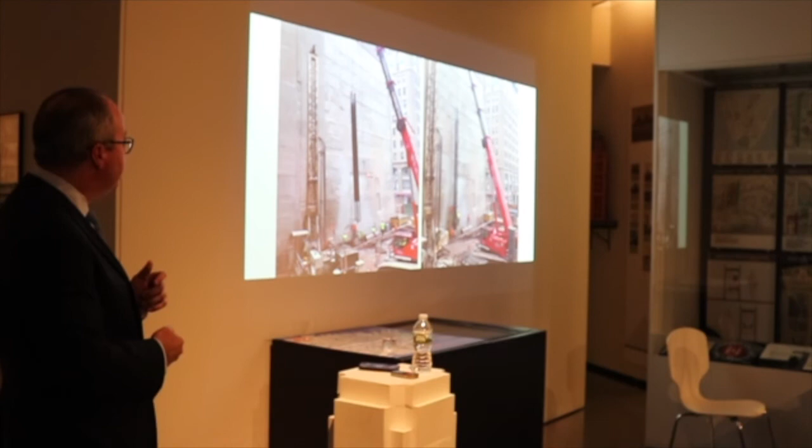28 minutes more. Again, you can see the caissons, the high-strength rebar with the couplers, which is a relatively new mechanism, a new material that we use in the city. The great thing about the couplers is it eliminates the splices, eliminates congestion, reduces the total amount of reinforcing steel in the building, so we like that. These are the walls starting to come up, some of the concrete.

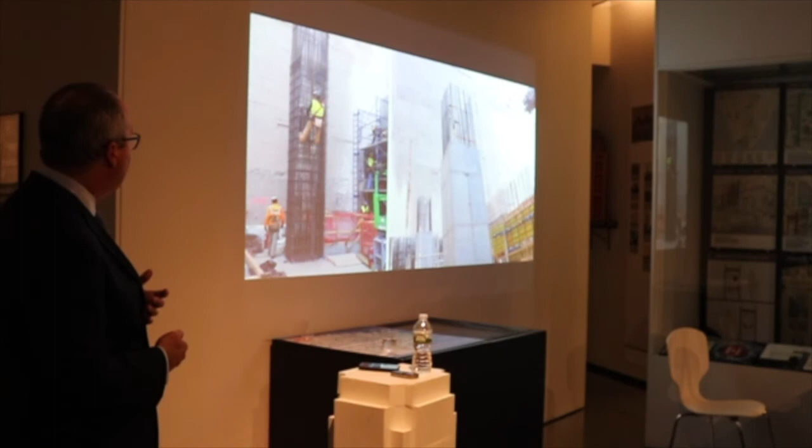Here you get a good sort of sense for the floor plate. I don't know where we took this, but that's a great shot. You can see the one flange coming up. Here we've got a little bit of a cantilever. I forget why we did that, but we did it.

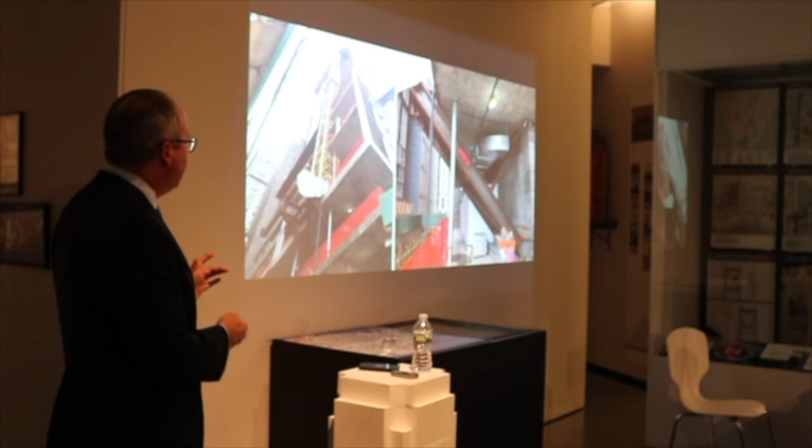This is how we're supporting the crane. Again, this is Thames, which is a super narrow street. It's more of an alley. I don't know why they call it a street. So we have to actually hang the tower crane off a bracket from the main core wall. Okay.

When I'm getting my Starbucks, I walk around the block. They were jumping the crane last night, right there. Well, there you go, past there. Yeah.

Just some more images, right? And you're watching it all sort of come together. These are the link beam steel between the two flanges. Here you can see, now we're not in mock-up mode anymore. We're in the actual mode of stripping, and I think the architectural concrete looks pretty good. You're not shaking your head. Like I said, we got 3 out of 4 things right.

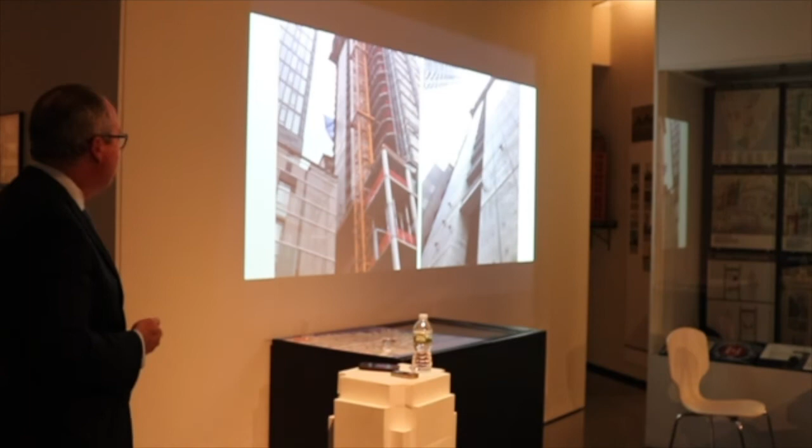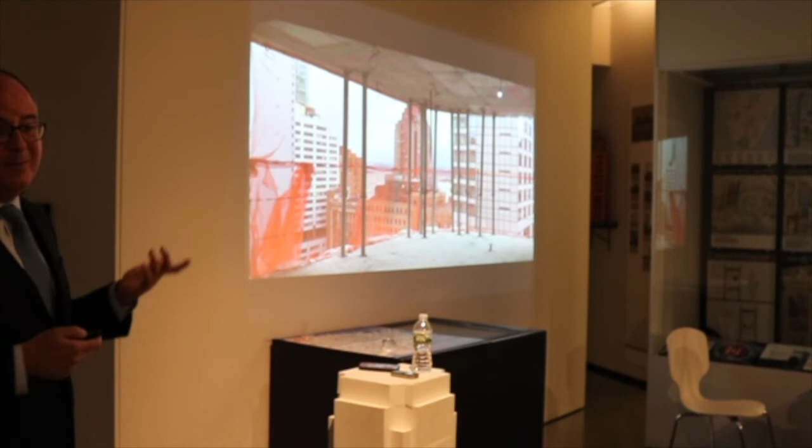But now you start to see the real views, right? And again, column-free corners. We used a thicker slab here to minimize the total number of columns, to maximize the views, because ultimately the building's about the views, right? And again, our client's not here, but part of our job also is trying to understand not just what we do as structural engineers, but what's the plan for the building? How are we going to market this building? What is the demographic? What is it that's really important?

And here, because of how we placed the core, those corners really became super important in terms of the layouts and in terms of preserving those views. You can start to see it coming up now. I don't know how far along. Are we at the halfway? No. 36? Okay, 32nd floor out of 88. Okay, so we got a ways to go yet. I guess that's it. All right. Yeah.

I bet there's some questions. Are there questions? Floor to floor. What is the floor to floor? Typical floor to floor, 11.5? 11 feet 5 inches. So there really are 88 levels. You didn't cheat by starting at 15 or something.

For the marketing floor? Yeah. We're skipping floors for the marketing, but not because of the floor to floor height. Floor to floor is actually tall, but we have very tall spaces in the podium. We have 20-foot, 30-foot spaces in the podium, so we're skipping a few floors for the marketing floors. So I guess the question is, is the 88 determined from the marketing or the construction? 88 is determined by the marketing, yes. And in this day and age, we're still avoiding the 13th floor, if you can believe that, right?